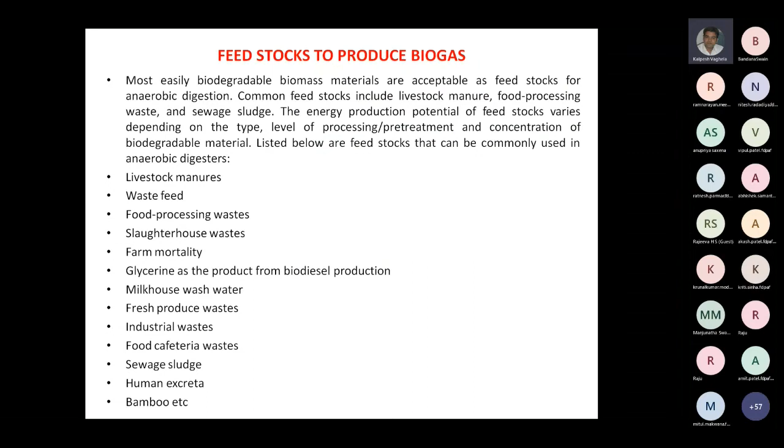The feedstocks which are commonly used for producing biogas are livestock manures, waste feed, food processing waste, slaughterhouse waste, farm mortality, glycerin which is available during biodiesel production, milkhouse water, wash water, fresh produce waste, industrial waste, food cafeteria waste, sewage sludge, human excreta, bamboo, etc.

Biogas production process can be divided into 3 stages. First stage is hydrolysis, second stage is acidification, and third stage is methane formation.

In hydrolysis, degradation of complex organic macromolecules into monomers during digestion is done. During acidogenesis, conversion of soluble monomers into volatile fatty acid is done. During acetogenesis, production of acetic acid is done. And during methanogenesis, conversion of acetic acid, hydrogen, and carbon dioxide into methane is carried out.

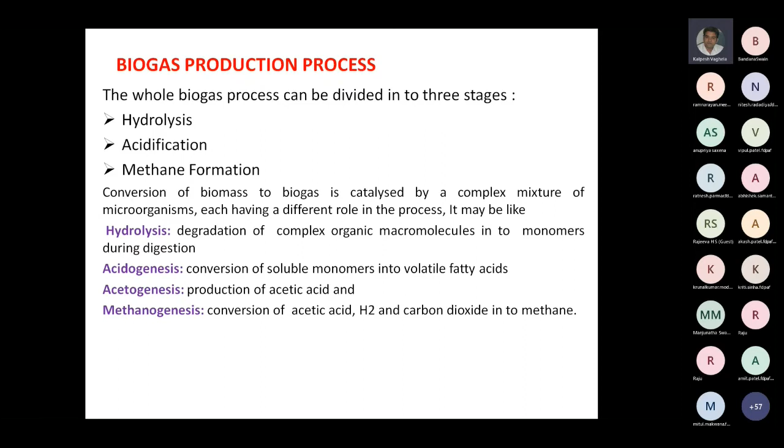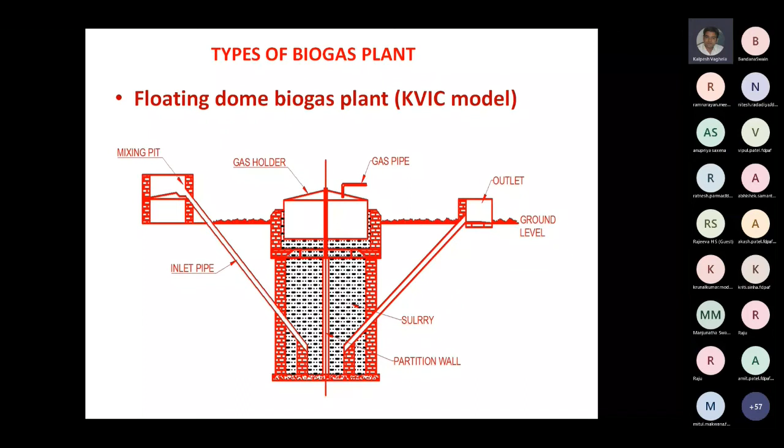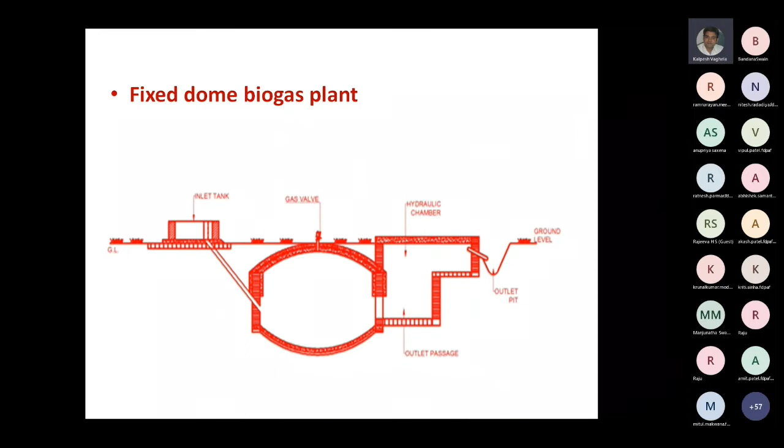Two types of biogas plants are mainly in use. For large capacity biogas plants, which we will be using for upgrading biogas, that will be a floating dome biogas plant that works on the KVIC model. Another model, known as fixed dome or Chinese model, we can consider only for lab use. For commercial production of biogas, the KVIC model is more in use.

The factors which affect production of biogas are temperature, solid concentration, loading rate, retention period inside digester, pH value of feedstock, toxic substances available in feedstocks, size and shape of digester, as well as stirring and agitation of content of digester.

Once you have obtained biogas, you can use it for different applications. Suppose you have to use it for a farm, then you can use it for producing electricity using gensets which will be using dual fuel mode engine. The same engine one can use to run an irrigation pump.

Also, food products, when you have to store for long duration, then you can use it in cold storage. In fact, the methane which is available is to be used as refrigerant, and that way you can use it.

For municipal use, as you know, municipality has to operate a sewage treatment plant, and during this sewage treatment process biogas is produced. So modern municipal corporations like Indore, Surat, Ahmedabad are getting biogas which is processed and then used to produce electricity. So they have installed biogas fuel plants.

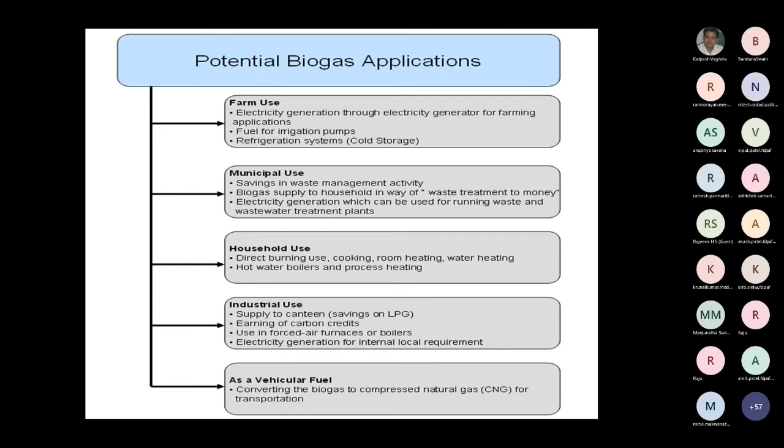Now, whatever biogas is produced, if we check its composition in percentage by volume, in biogas you may find methane, CH4, 50 to 70% by volume. If you check its carbon dioxide content, it may vary from 25 to 50% depending on feedstock.

Biogas may also have hydrogen in the range of 1 to 5% by volume, nitrogen in the range of 0.3 to 3%, and water vapor, almost 0.3% by volume. It may have hydrogen sulfide traces. Remember that cow dung is the feedstock which will give you the least amount of hydrogen sulfide, whereas all other organic matter may have hydrogen sulfide from 200 ppm to 1000 ppm. So cow dung is considered an ideal feedstock when biogas is to be processed to convert it into fuel for vehicles.

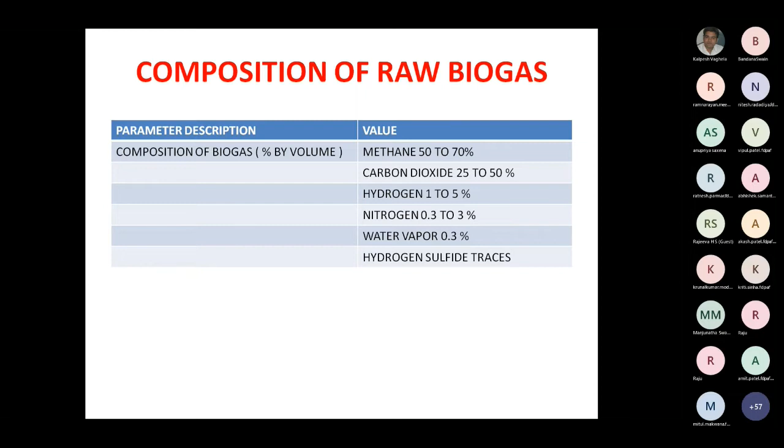Now this is the table which is showing you composition of raw biogas, upgraded biogas and compressed natural gas. If we compare methane content for all these three fuels, raw biogas has methane from 55 to 65%, whereas natural gas may have methane up to 89.14%, and upgraded biogas may have even up to 98%, but in general the value is about 90% methane, which is sufficient enough to be used as fuel for a vehicular engine.

Carbon dioxide, if we check, in raw biogas by percentage volume it will be 35 to 45%. When you upgrade that biogas, carbon dioxide will get reduced to almost up to 4%. In general, natural gas which is available naturally may have carbon dioxide around 4.38% by volume.

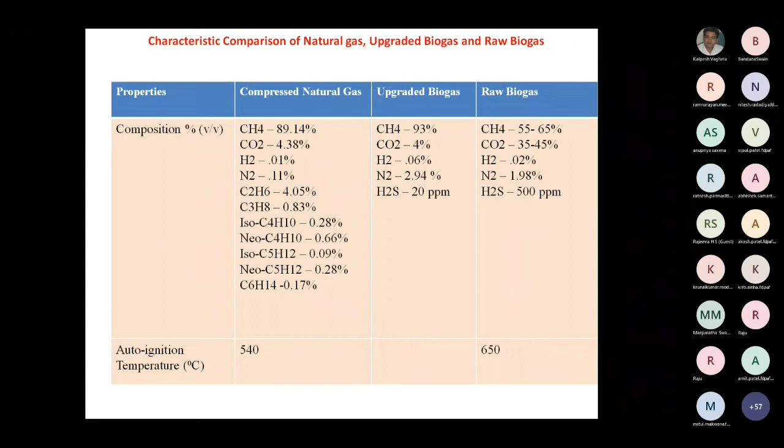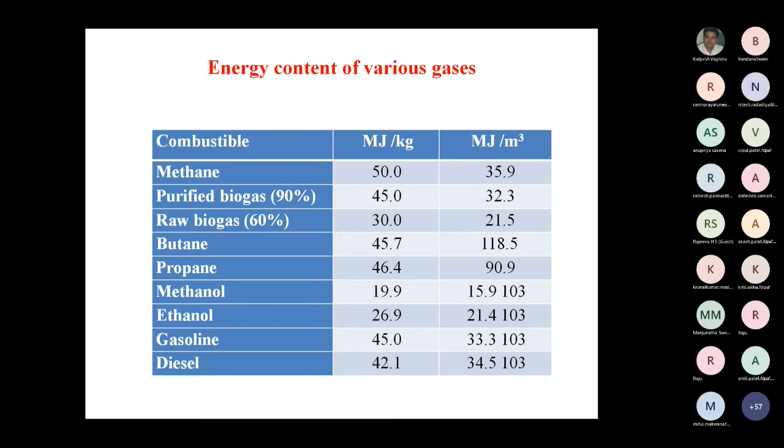If pure methane is there, its energy content is 50 megajoule per kg or 35.9 megajoule per meter cube. So higher the methane content, higher will be the energy content of your fuel. So purified biogas considered here is 90% methane. But if you are getting higher content of methane like 91 up to 98%, which is obtainable right now due to advances in processing biogas, then your energy content will be higher, and depending on that, more heat will be generated.

Now here different properties of biogases are discussed. Calorific value of raw biogas with methane content around 60% by volume is 21.5 megajoule per meter cube. Its auto ignition temperature, which is 650 degrees centigrade, is more as compared to petrol. Higher the auto ignition temperature, safer the fuel is considered. So as compared to petrol, raw biogas is considered a safe fuel. As this gas mixes readily with air even at low temperature, there is no need to provide a rich mixture during starting or idling.

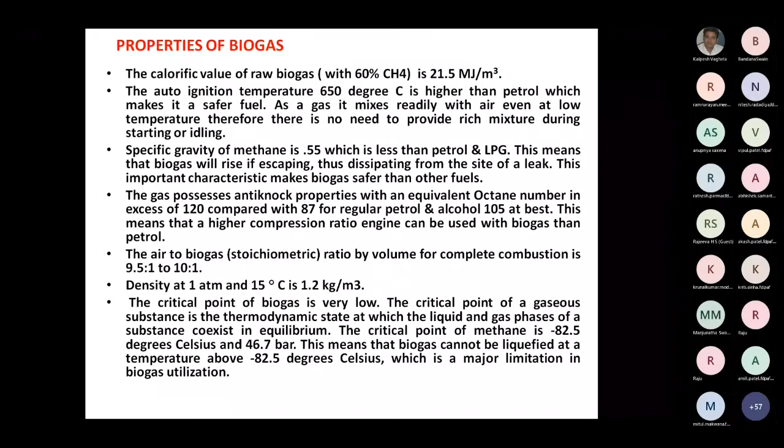Now, related to biogas and bio-CNG, certain initiatives are taken by the Government of India. In 1999, the NDA government focused mainly on biodiesel and bioethanol.

And after that, in 2010, the UPA government started promoting bio-CNG. Our Honorable Prime Minister has given 4 following principles of our vision of India's energy future: energy access, energy efficiency, energy sustainability, and energy security.

And for achieving this, different initiatives started by the Government of India are Gobardhan, NNBOMP, SATAT National Policy for Biofuels, BPGTP, and Waste to Energy Program.

Related to biogas, if we consider initiatives taken, Gobardhan stands for Galvanizing Organic Bio-Agro Resources. This project was launched in 2018 to convert cattle dung and solid waste in farms to compressed biogas and compost, which can be used as fertilizer.

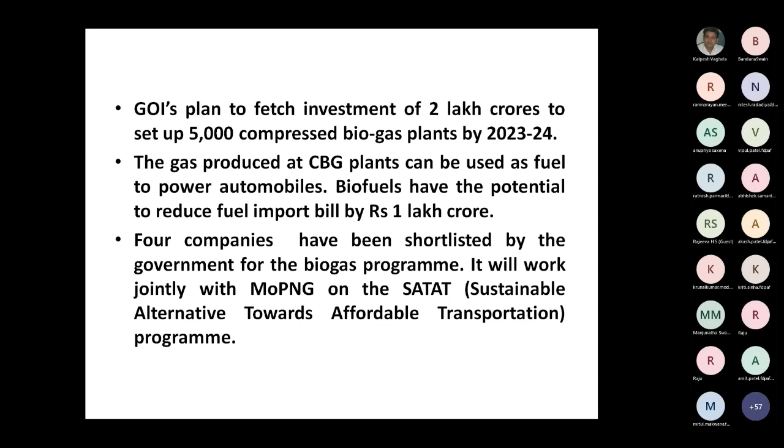Concentrating on composition of biogas, our main target is to increase methane content and reduce CO2, water, O2 and hydrogen traces. When you increase methane content of raw biogas, its composition becomes identical to natural gas. This gas is to be compressed like natural gas, then it will be known as compressed biogas.

When we have to use this biogas as fuel for engines, two different approaches are to be considered. Suppose you have to use it nearer to the plant at which biogas is generated, then we have to consider use of diesel engine, whereas when you have to consider its use as fuel for automotive applications, then it is to be considered as a replacement fuel for petrol.

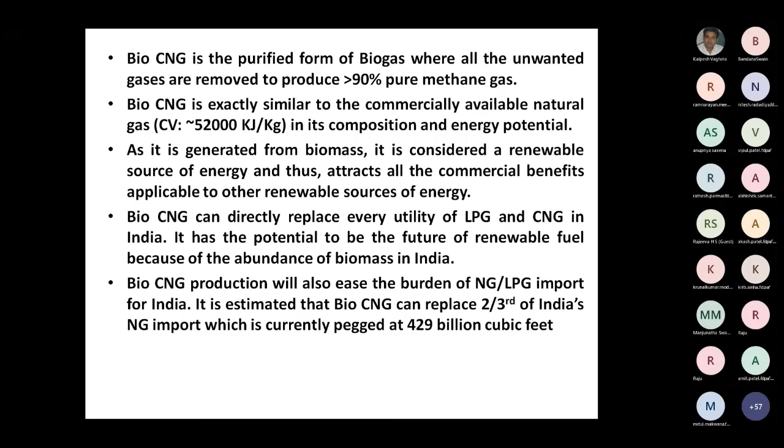So at different places, Government of India has started installing these biogas purification plants. It is targeted that if we use our resources available locally, then two-thirds of our natural gas import we can reduce, which is 429 billion cubic feet.

Now, where is the scope of biogas upgradation in India? You have seen in India there are so many common cattle sheds known as goshalas, as well as cattle ponds known as Panjrapols, where animals are given shelter. Such institutions are run on charity basis, and you may have seen these institutions are not that strong financially.

So if we install large capacity biogas plants at such locations, along with biogas upgradation and compression systems, this may enable these institutions to improve their financial capabilities utilizing their own resources. Considering this, government is promoting use of biogas and biogas operated engines, both stationary as well as automobile engines, which will emit zero or low pollution, thus may save environment.

Technological improvement in biogas for its use as vehicle fuel is a new and emerging field in India. This development of biogas production plant followed by enrichment and compression in a village or a cluster of villages can encourage rural entrepreneurship, which may help in sustainable rural development and can provide employment opportunity to so many people.

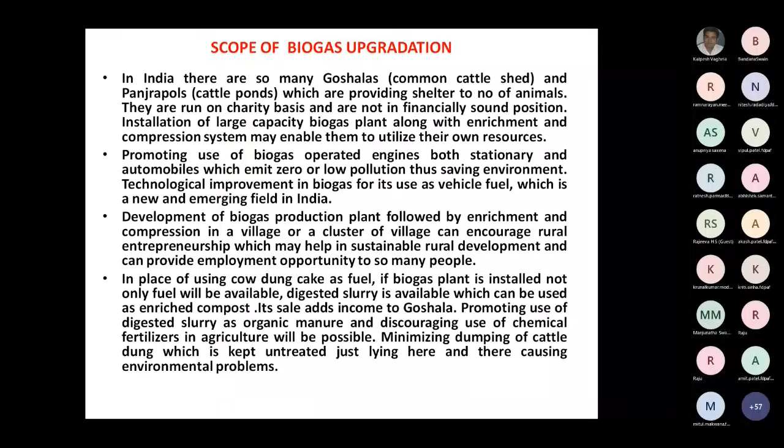Now we will consider biogas upgradation, starting with harmful effects of hydrogen sulfide, moisture and CO2. Hydrogen sulfide, which is present in biogas...

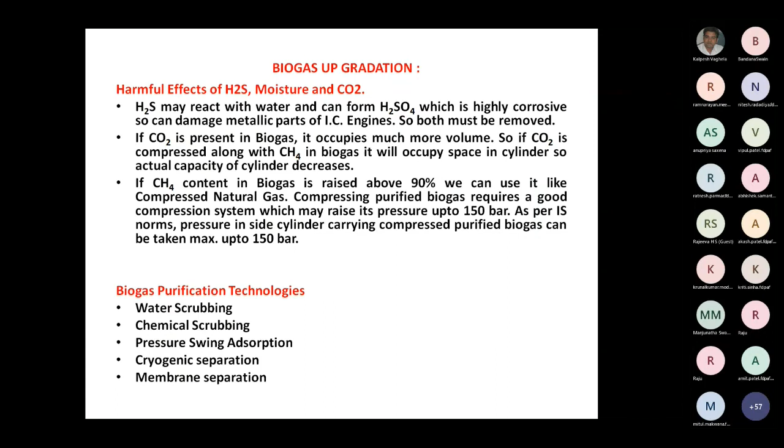That's why most people are installing water scrubbing units or pressure swing adsorption units. Chemical scrubbing is not much popular in India, but it is popular in European countries.

Now, when we have to increase the potential of biogas as a fuel for IC engines, how is that possible, what actions are required to achieve that, what are the targeted values, and which action will be useful for which application - that we should study.

First of all, we have to reduce its corrosive nature. To reduce its corrosive nature, we have to remove hydrogen sulfide and moisture from raw biogas. Once you have removed hydrogen sulfide and moisture from raw biogas, then you can use it as fuel.

for stationary IC engines. Right now, there are no standards suggested by BIS for this H2S content and moisture content when we have to use that biogas as fuel for stationary engines.

But to increase the life of our equipment, we have to reduce this hydrogen sulfide and moisture as much as possible.

So after removing hydrogen sulfide and moisture, your raw biogas will be a suitable fuel for stationary IC engines.

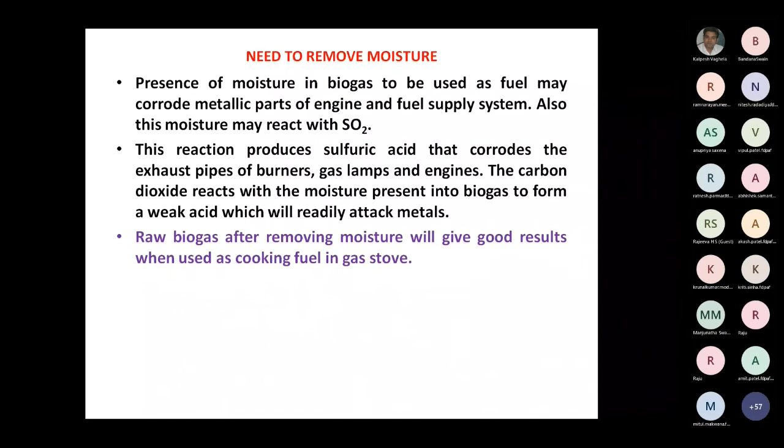One possible remedy is to add less sulfur-rich material in the plant, dilute with water and stir it vigorously.

So, whatever feedstock you are using for your biogas plant, you have to check its sulfur content, and accordingly you can control H2S.

Presence of H2S may cause corrosion to metal parts such as regulators, gas meters, valves and mountings. That is much more serious, as these will get corroded very quickly.

When you carry out combustion of biogas containing hydrogen sulfide, it will produce sulfur dioxide. And when the sulfur dioxide combines with water vapor, it will again produce sulfuric acid, which may corrode pipes of burners, gas lamps, engines, etc.

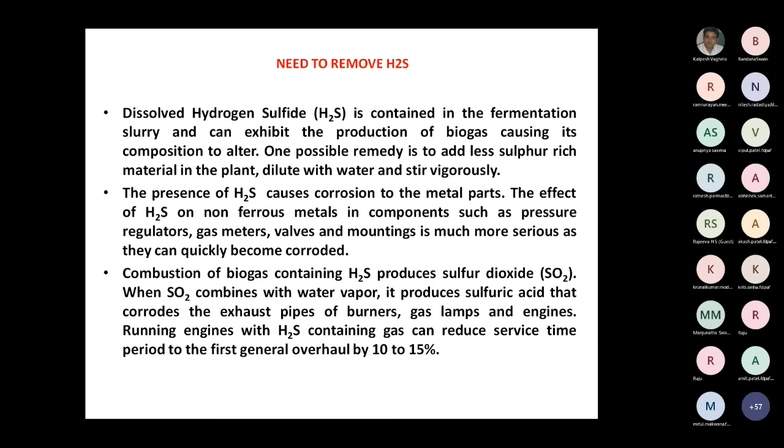So, running engines with hydrogen sulfide containing gas can reduce the service time period to the first general overhaul by 10 to 15%.

The gaseous SO2 also dissolves in engine oil, causing the oil to become acidic and lose its ability to lubricate, damaging the engine and shortening the life between oil changes.

The sulfur dioxide is considered more dangerous than H2S, as it is hazardous for health and environment. It will produce smog as well as acid rain.

Requirement for H2S removal from biogas varies depending on biogas utilization technology. In European countries, the H2S limit for electricity production by IC engines is kept limited to 100 ppm.

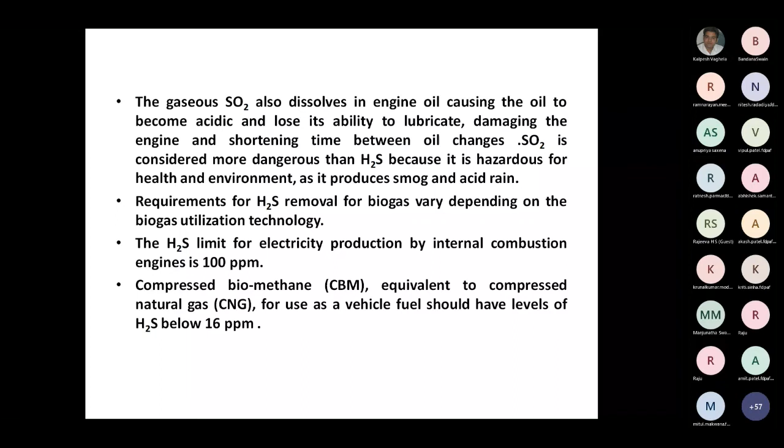Compressed biomethane equivalent to compressed natural gas, for use as a vehicle fuel, should have a level of H2S below 16 ppm as per our BIS.

Now we will see different techniques to remove hydrogen sulfide. The first technique is the oxidation process.

For this purpose, in the digester, a small amount of air - 3 to 6% of the volume of produced biogas - is introduced, for which small capacity compressors or blowers are used. This results in the chemical reaction: 2H2S plus O2 gives 2S plus 2H2O.

By adding ferrous materials also we can remove sulfur. For this, we can use oxidized steel wool or chips of iron cut, which is easily available from lathe operations. When raw biogas comes into contact with steel wool or chips, this iron oxide gets converted to elemental sulfur.

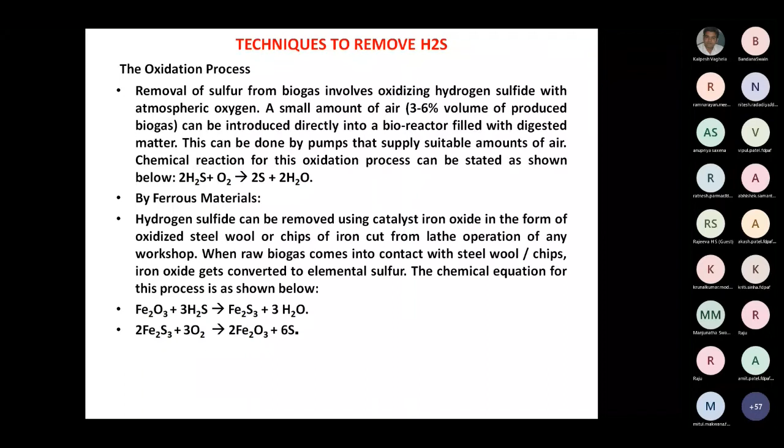The chemical equation for this process is: Fe2O3 plus 3H2S gives Fe2S3 plus 3H2O. Then after this, 2Fe2S3 plus 3O2 gives 2Fe2O3 plus 6S. This way sulfur is removed.

Wet technique to remove H2S: for this, caustic is used. NaOH plus H2S gives NaHS plus H2O. This hydrogen sulfide reacts with sodium carbonate present in solution, forming sodium hydrosulfide: H2S plus Na2CO3 gives NaHS plus NaHCO3.

This hydrated iron oxide introduced in solution will react as: Fe2O3 plus 3NaHS plus 3NaHCO3 gives Fe2S3 plus 3H2O plus 3Na2CO3 plus 3H2O.

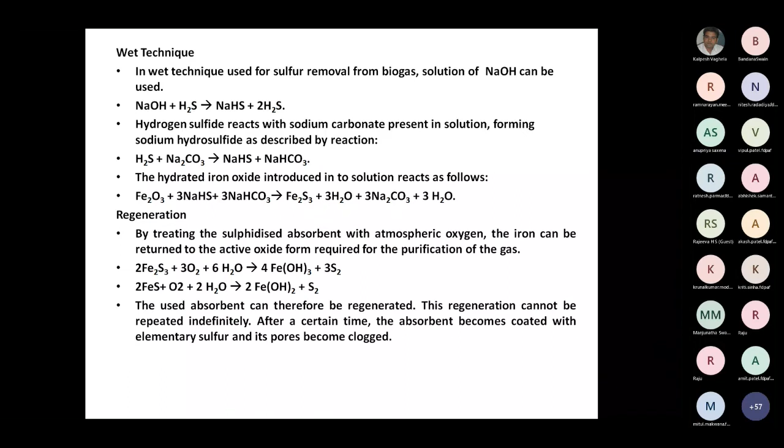Now, regeneration is also possible by treating the sulfide absorbent with atmospheric oxygen. The iron can be returned to the active oxide form required for purification of biogas. This regeneration cannot be repeated indefinitely. After a certain time duration, these absorbents become coated with elemental sulfur and their pores become clogged.

Now, the potential of biogas and bio-CNG. Natural gas contains 75 to 98% methane along with a small percentage of propane, butane, ethane, etc. Whereas raw biogas may have 60% methane and 40% carbon dioxide.

So the techniques already in use to process natural gas can be used for upgrading the quality of biogas also, by enriching its methane content up to the level of natural gas. Now, to utilize biogas as fuel for IC engines, two different approaches are considered: biogas to produce electric power, and biogas to bio-CNG.

In the power project, biogas is first cleaned and H2S and moisture are removed. Then biogas is fed to the power generating unit to convert it into electricity. Here there is no need to remove CO2, but removal of hydrogen sulfide is important as it is highly corrosive.

In case of bio-CNG production, biogas is cleaned of H2S and CO2 to produce 95% methane. The bio-CNG produced is then compressed and bottled for transportation to the utility site.

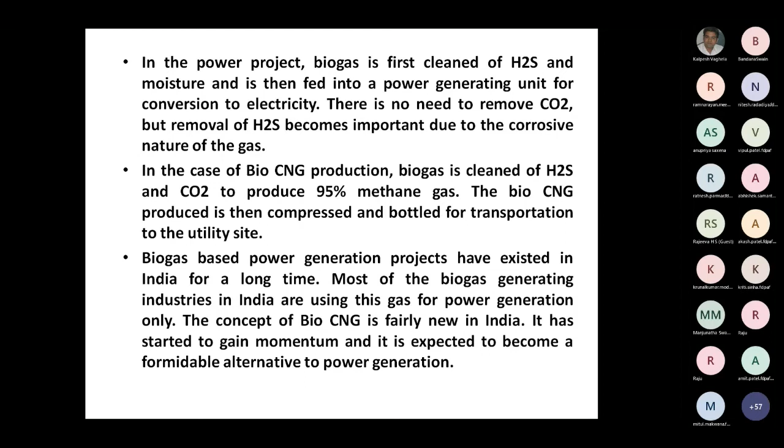Now, related to the use of biogas as fuel for stationary engines, we will study that first, and then how it can be used as fuel for vehicular engines, we will see afterwards.

So first case study: the animal hostel project started by the Government of Gujarat at Akodara village near Himmatnagar. Here villagers do not keep their cattle at home; all cattle are managed under a cooperative approach, with a common cattle shed constructed where cattle are kept.

At that place, a Gobar bank has also been set up to generate electricity. The power produced by the Gobar bank satisfies the internal needs of the animal hostel.

At this Akodara site near Himmatnagar, you will find 36 sheds. Water availability is through a 1 lakh liter water tank and a sump of 80,000 liters. Here you will find 3 units of 85 cubic meter plants, totaling 255 cubic meters of biogas plants.

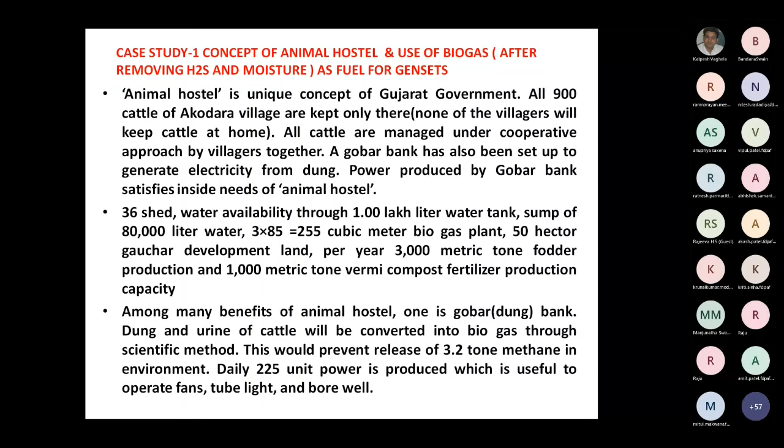This prevents the release of 3.2 tons of methane into the environment. Methane is highly dangerous when released to the atmosphere. Daily, 225 units of power are produced, which are used to operate fans, tube lights, and bore wells.

This is a photograph showing this animal hostel at Akodara near Himmatnagar. Here, the caretaker of the animal hostel collects cow dung and brings it every day to the biogas plant, where it is weighed.

This cow dung is stored in a storage tank, where there is a crusher to crush it. Cattle dung taken from the dung loading platform area is delivered to the feed preparation tank section, where it is mixed with water, maintaining a ratio of 1:1 for fresh cattle dung and 1:1.25 for stale or hard cattle dung.

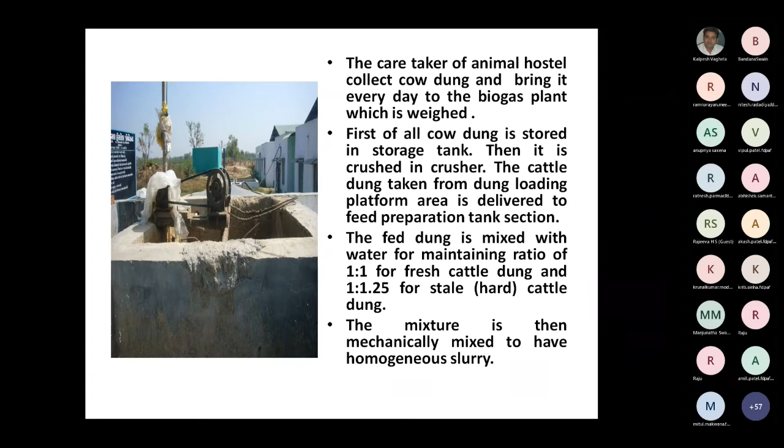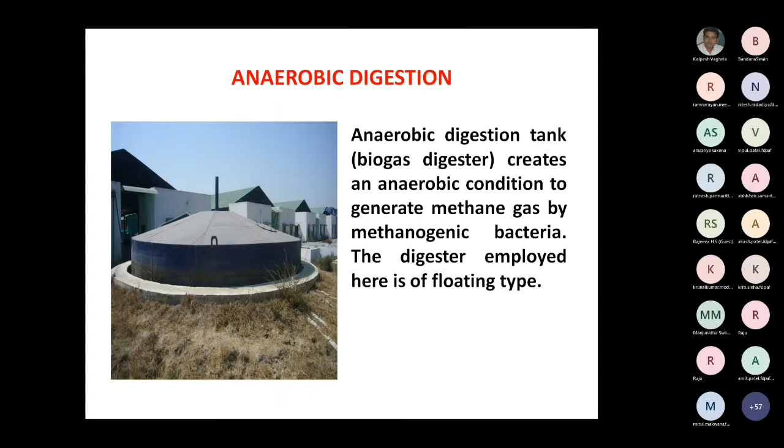The mixture is mechanically mixed to form a homogeneous slurry, then passed to the anaerobic digestion tank or biogas digester, creating anaerobic conditions to generate methane gas by methanogenic bacteria. Here a KVIC type biogas plant is used, employing a floating type biogas plant. There is a common collecting tank, which is an intermediate gas storage before the pressure regulating tank, provided for distribution to concerned beneficiaries.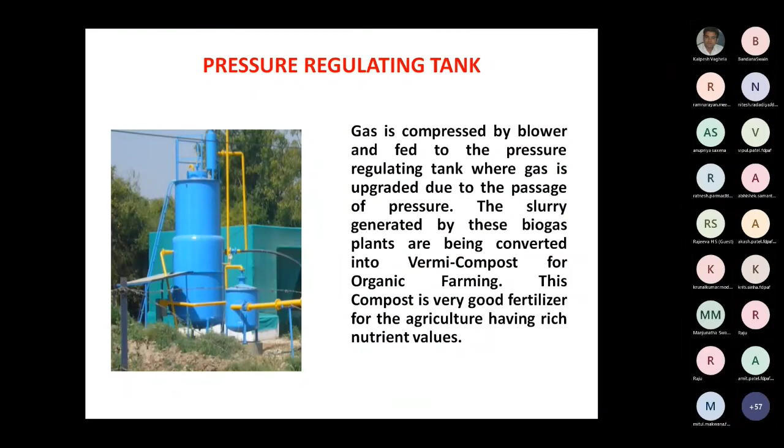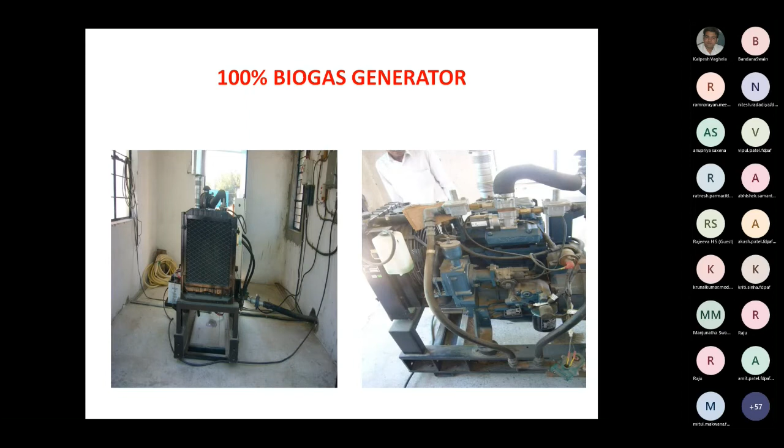Here at the site you will find a Kirloskar made biogas genset that runs fully on biogas. This is not a dual fuel engine; it uses only biogas after removing moisture and H2S. This shows the specification of that biogas generator, which runs fully on biogas.

This generator produces electricity used to run a 10 HP electric motor for pumping water, 275 light bulbs of 40 watts for lighting, and 120 fans of 100 watts, which are also used at this animal hostel.

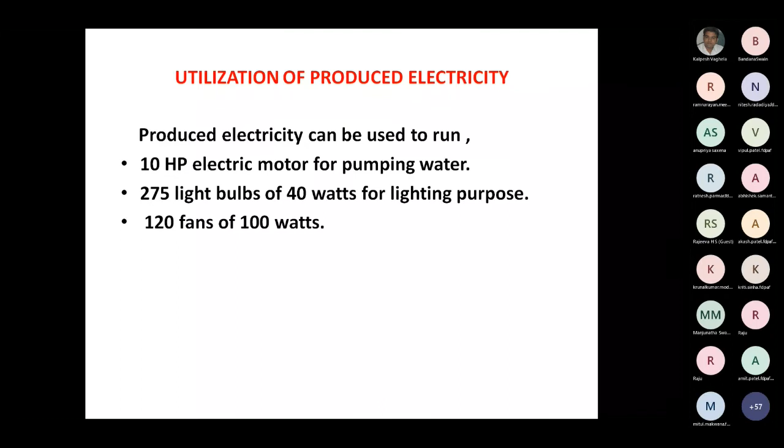The second case we will consider is the Laxmanpura site, a community biogas plant situated near Palanpur. Here a different reactor is used, called a moving bed high rate anaerobic reactor, used to generate biogas using multi-feed technology.

Here not only cow dung is used, but also vegetable waste. Near Palanpur from Disa, potato waste is available and mainly used at this site, but over and above that, agriculture waste, sugar mill waste, food waste, and poultry waste can all be used for this reactor.

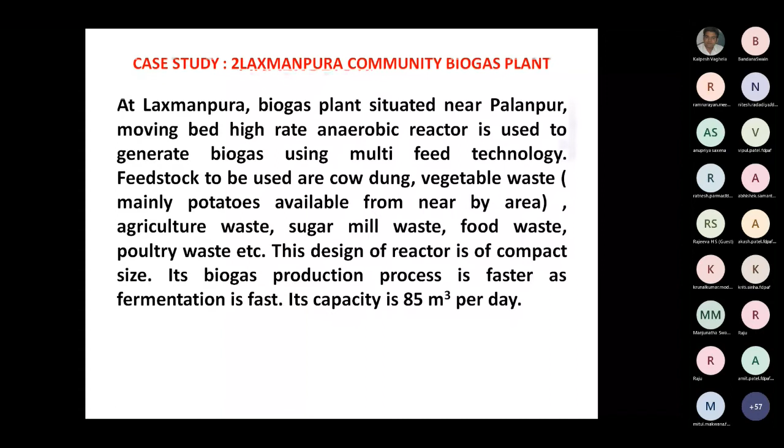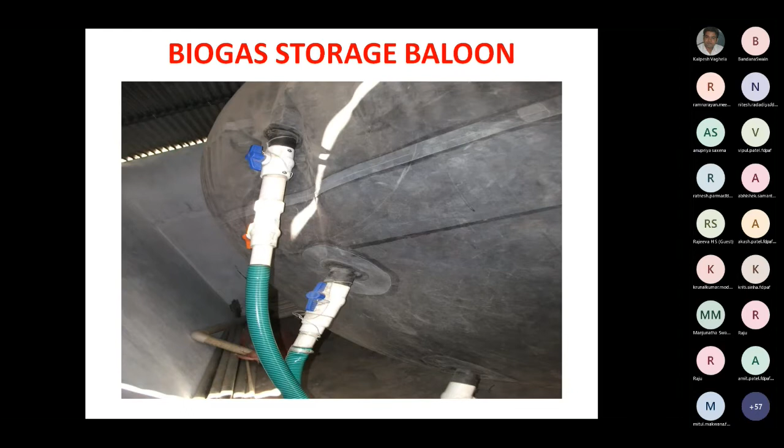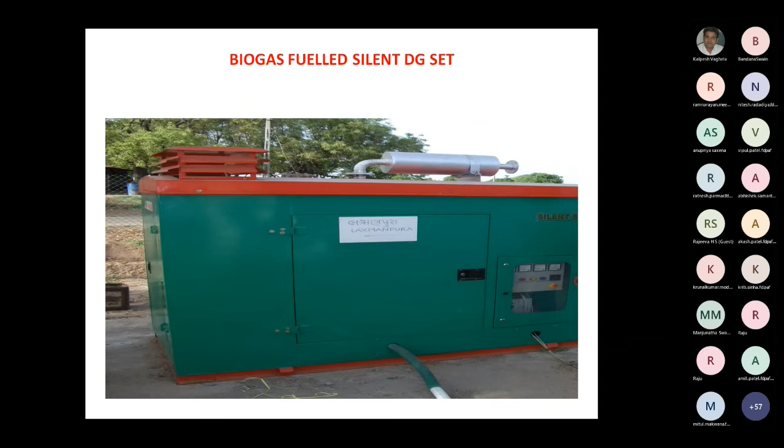This shows the biogas storage balloon. The gas produced is stored in large sized balloons, and before supplying it to the genset, it must pass through the H2S scrubber where H2S and moisture are removed. Here a silent DG set is used, also running fully on biogas. This is a single fuel engine, not a dual fuel engine.

For biogas generation and utilization at this community biogas plant, all villagers bring cow dung regularly, which is stored, crushed, and then supplied to the digester for the acidic process. Then it is supplied to the second digester for bacteria generation. After that, the produced biogas is stored in a balloon made from flexible synthetic material.

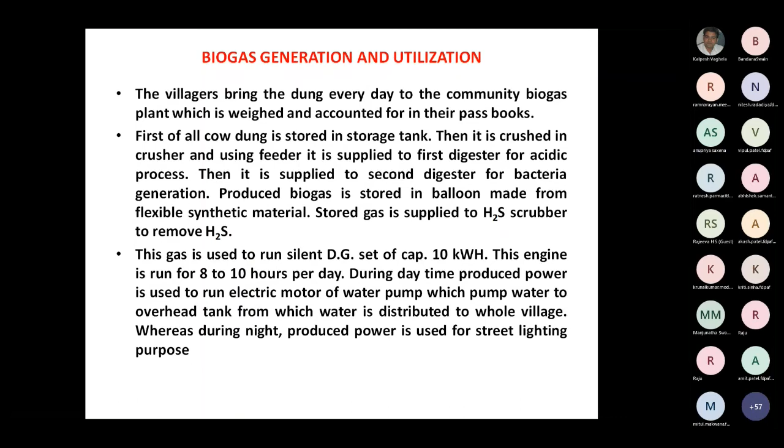The stored gas is then supplied to the H2S scrubber to remove H2S, and after that this gas is supplied to run a silent DG set of 10 kilowatt hour capacity. This engine runs for 8 to 10 hours daily, for the same purpose as considered for the Akodra site.

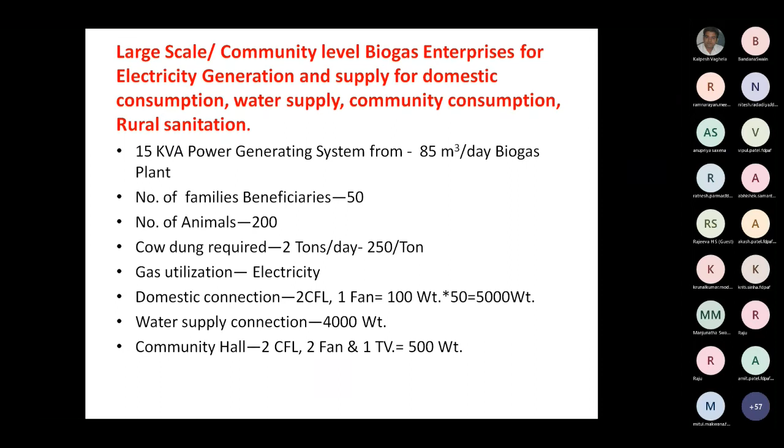Now, when we have to use this purified biogas as fuel for vehicular engines, we have to consider this treatment. After removal of H2S and moisture, you can use that biogas for stationary engines, but when you have to use it as fuel for vehicular engines, you also have to remove CO2.

CO2 is present in raw biogas at a very high concentration. This decreases its energy content per unit mass or volume and limits its use for low quality energy applications.

The presence of CO2 is highly undesirable because it lowers power output from the engine, occupies additional space in gas storage cylinders, requires more frequent refilling of the vehicle's fuel tank, and results in more energy consumption in compression of biogas. So if CO2 along with methane is compressed and supplied to the storage tank, the more CO2 there is, the more energy is wasted, as CO2 is in no way useful for increasing the energy content of our fuel.

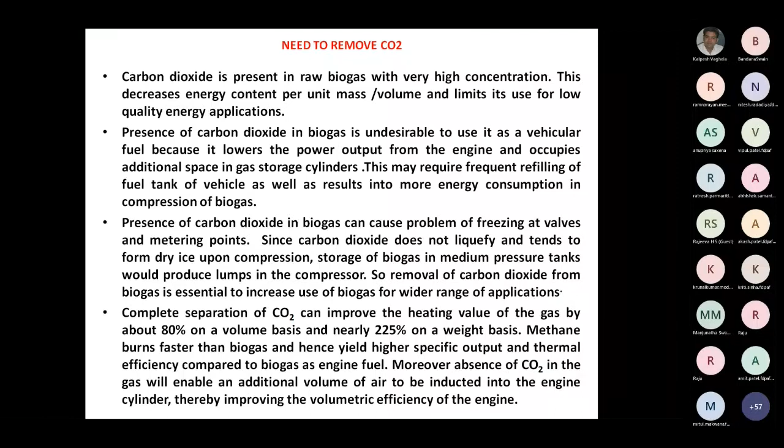Also, if CO2 is absent in your biogas which is to be used as fuel, this will enable an additional volume of air to be inducted into the engine cylinder, which will improve volumetric efficiency of the engine. This way, CO2 should be as minimum as possible.

Carbon dioxide from biogas can be removed by different techniques, such as water scrubbing, caustic scrubbing, solid absorption, liquid absorption, and pressure separation. If we consider all these techniques, the simplest and cheapest method of removing carbon dioxide is by washing the gas with water under pressure.

A large quantity of water is required to absorb CO2, and the corrosive acidic spent water needs special attention. So you have to consider installation of such a unit only where an abundant quantity of water is available. For places where there is scarcity of water, you cannot use water scrubbing; you have to go for chemical scrubbing or any other such process.

Caustic scrubbing is carried out by allowing CO2 in biogas to react with caustic solution, forming an irreversible carbonate and subsequently reversible bicarbonate. For this, a solution of NaOH and water in 40:60 ratio by weight can be prepared in a container. Then raw biogas is allowed to pass through the solution, giving the reaction: 2NaOH + CO2 gives Na2CO3 + H2O.

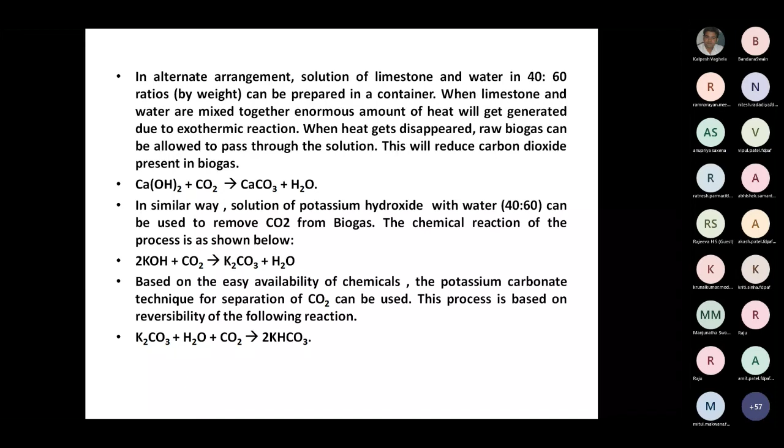Now this is showing you BIS 16087, which was available in year 2016. When you have to use biogas as fuel for automotive application and inject it into a piped network, you know natural gas pipeline is laid by Gas Authority of India Limited as well as Gujarat State Petroleum Corporation, GSPC. So when purified biogas has to be injected into such a pipe network, you have to change its composition, and for that BIS 16087 was made.

Here methane should be minimum 90%. CO2 should be maximum 4% volume by volume. Carbon dioxide plus N2 plus O2 combined together should not exceed 10%. Oxygen content separately should not exceed 0.5% volume by volume.

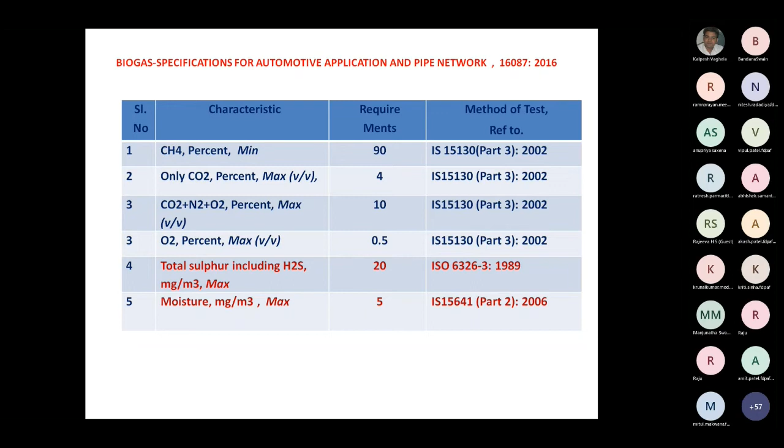Sulfur, including hydrogen sulfide in your biogas, should not increase beyond 20 milligram per meter cube. Likewise, moisture should be limited to 5 milligram per meter cube. This is a very important standard available since year 2016. So if you have to install a biogas upgradation plant, you have to produce purified biogas satisfying these specifications suggested.

Now we will see different biogas purification techniques. More importance is to be given to physical absorption, chemical absorption, and pressure swing adsorption, which are the techniques in use for commercial purposes, whereas two techniques, cryogenic technique and membrane technique, we will consider only to understand that these are processes one can also use for purifying biogas.

Now this schematic arrangement is showing you physical scrubbing. As per Henry's law, CO2 is more soluble than methane. That is the working principle on which this system is designed to work.

Here you can see raw biogas is coming from the plant. There is a compressor which will compress this biogas. The value considered is 0.4 to 1 megapascal and temperature considered is 40 degrees centigrade. This way raw biogas is compressed, and we have to supply it for processing purpose.

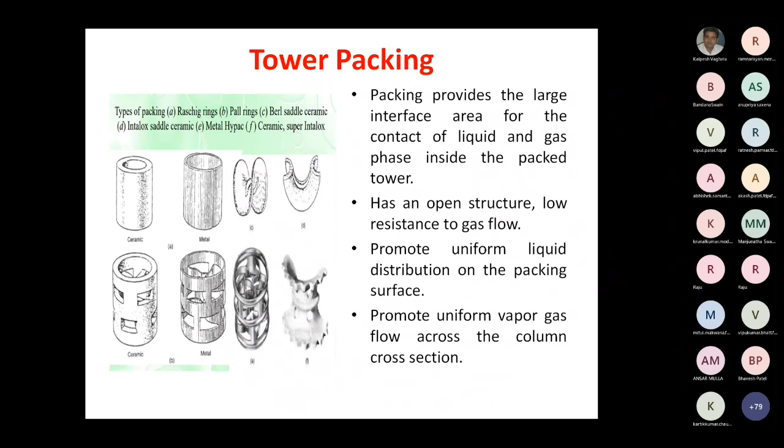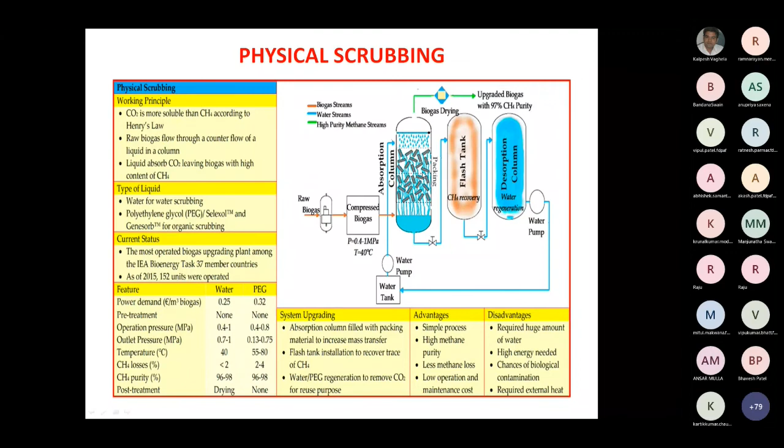When a packed column is used, you have to make use of these tower packings. These packings provide a large interface area for the contact of liquid and gas phase inside the packed tower. This has an open structure, low resistance to gas flow, and promotes uniform liquid distribution on the packing surface as well as uniform vapor gas flow across the cross section. So these tower packings you have to use at this section, in the column, at this place you have to provide such tower packings.

Now one low cost biogas purification unit which was developed is shown here. Here you can see the arrangement. From top of this column, this green pipeline shows supply of water. Water is pumped, and with increased pressure, water will be supplied from this point. Raw biogas will be entering from the bottom.

Here you have to provide such a seal to escape backflow of gas. If you provide such a loop seal, water will get retained here, so it will provide a seal against the gas. So it is a must to provide such a water seal.

Water will be sprayed through a nozzle from the top, and raw biogas will be entered, supplied from the bottom. There will be physical scrubbing, and then biogas will come out from the top, so the outlet of purified biogas is taken from the top.

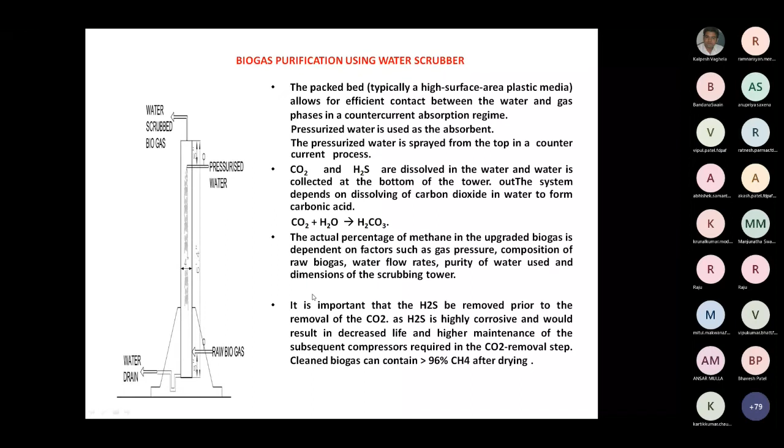This way, using water scrubbing, we can remove hydrogen sulfide and CO2. Once hydrogen sulfide and CO2 are removed, you can use it as fuel for vehicular purposes, and for that purpose you have to compress it. This is showing CO2 plus H2O, that gives you H2CO3, so the water which will be drained will be having carbonic acid.

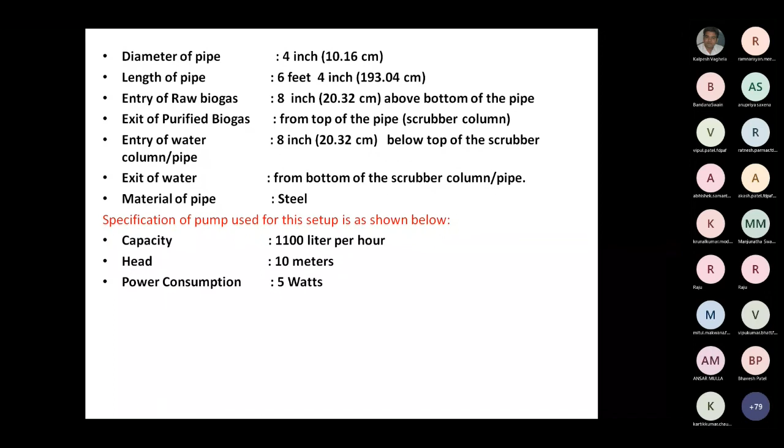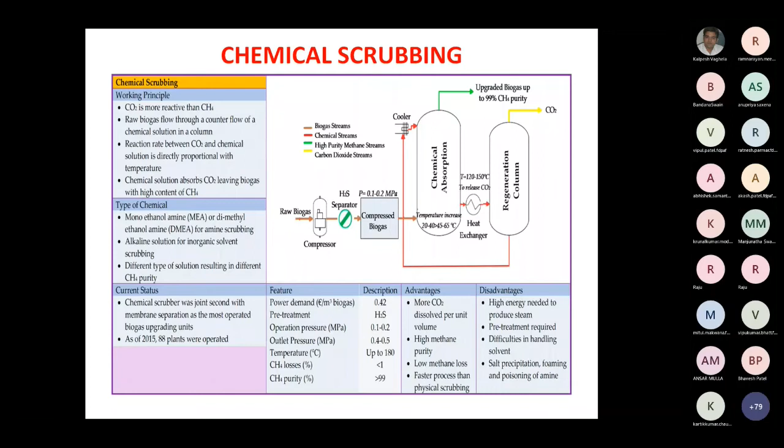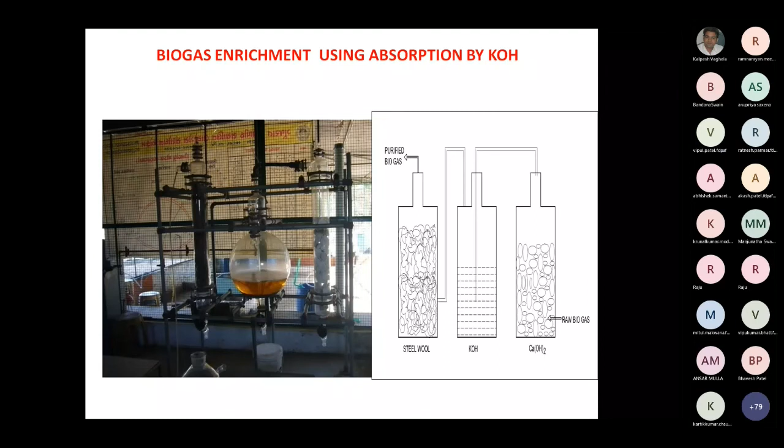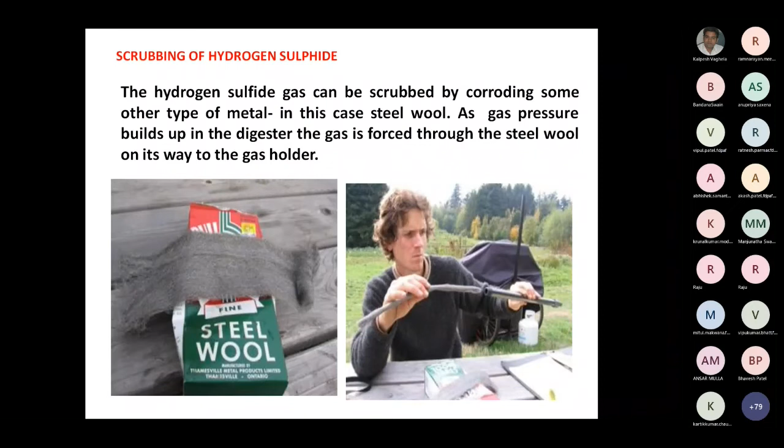So this is showing how steel wool can be used for removal of H2S. For any stationary engine, you can make such a unit - this H2S scrubber - yourself. Just take any PVC pipe and insert steel wool inside. Biogas will have to pass through the steel wool, and when it does, it will corrode the steel wool, resulting in elimination of sulfur and H2S.

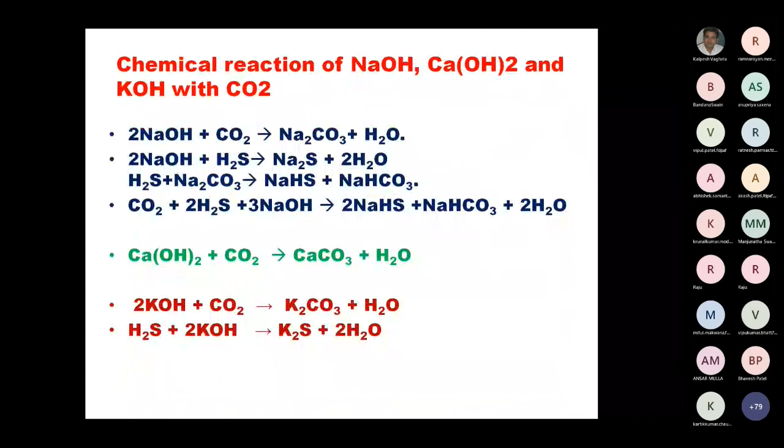This is showing use of NaOH for removal of H2S and CO2. Now when you are using all these three different chemicals, NaOH, Ca(OH)2 or KOH, and if you are using two different pressures - the pressure at which biogas is generated, same pressure you are supplying, and in the second case you are supplying biogas after compressing it to 10 bar - you will get different results.

Caustic as well as lime both are available in large quantity in our Saurashtra region as well as in our South Gujarat region. In South Gujarat region, we don't have scarcity of water, whereas in Saurashtra region there is scarcity of water. So preference is given to such chemical scrubbing. With use of potassium hydroxide, we can get the best result.

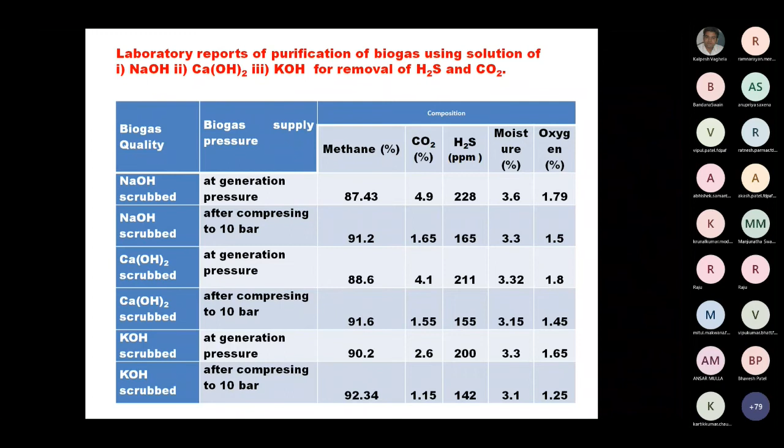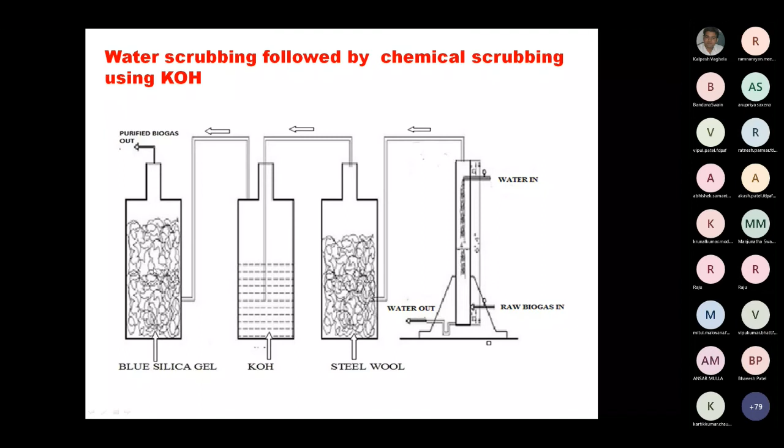This is showing that setup. Steel wool - first of all, raw biogas that will be supplied to water scrubber, then after steel wool, then after KOH, and for removal of moisture, blue silica gel is used.

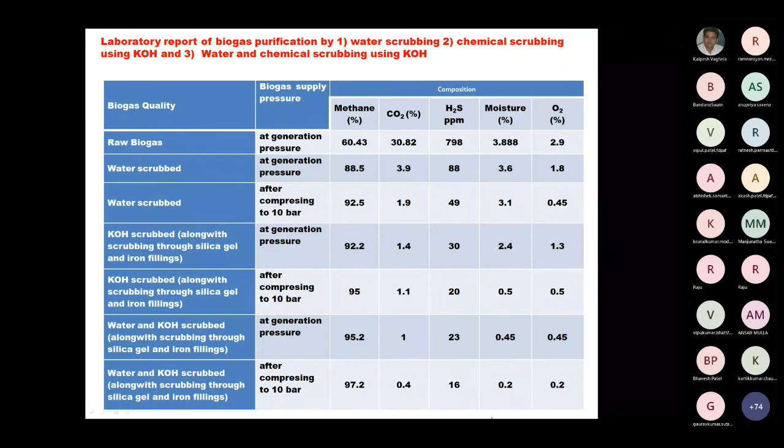Now another technique which is becoming more and more popular where scarcity of water is there. Also when you have to consider use of chemical scrubbing, depending on which chemical you are using, cost is associated. So considering scarcity of water and considering cost of chemical, another technique which is being used and which is becoming more and more popular is the pressure swing adsorption technique.

This technique was originally developed by Linde, and then after that the technology was transferred to many other organizations. In India, the technology is given to BHEL. Previously it was BHPV, Bharat Heavy Plates and Vessels. That unit is taken over by Bharat Heavy Electricals Limited. So they are providing such pressure swing adsorption units for purifying biogas.

And if we consider locally, in Ahmedabad only there are 4 different private players which are highly popular all over India. One of that organization is Atmos Power. Whether you visit Rajasthan, Madhya Pradesh, or Haryana, at all different places you will find pressure swing adsorption process to purify biogas that is supplied by Atmos Power, the company situated at Naroda, Ahmedabad. So what is the working principle of this technique?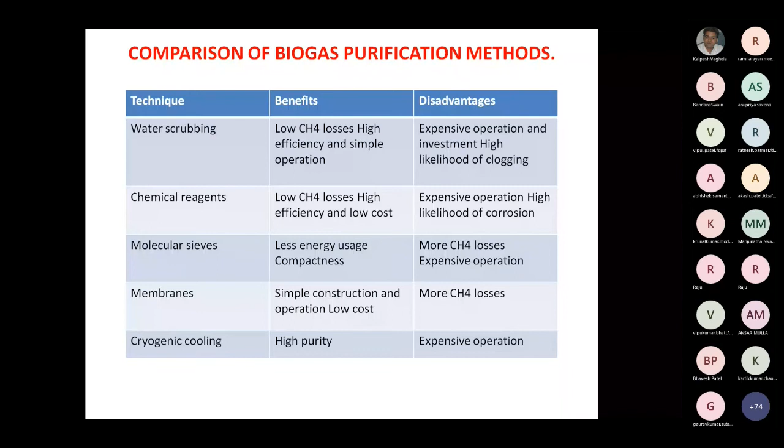Now once biogas is upgraded, then it is to be compressed so that you can transport it from one place to another place. So the energy density of upgraded biogas is comparatively low at ambient pressure, and as a result, it must be compressed at high pressure, 200 to 250 bar, to allow sufficient storage in bottles or cylinders.

You have seen in case of CNG, almost 200 bar pressure is taken. Previously, Government of India organization, the regulatory body PESO, had given 150 bar as the maximum pressure allowed. Now it is allowed up to 200 bar, but in the field I have seen people taking pressure up to even 250 bar for their cascades when it is to be transported from one place to another.

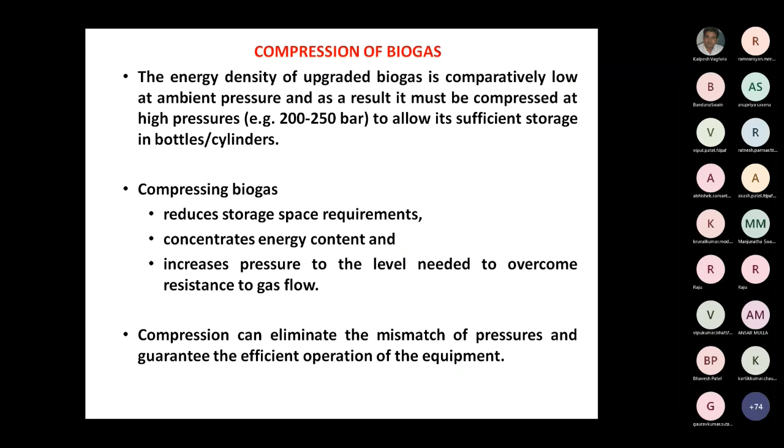Compressing biogas will reduce storage space requirement, will concentrate energy content, and increases pressure to the level needed to overcome resistance to gas flow. Compression can eliminate the mismatch of pressure and guarantee the efficient operation of the equipment.

Here you can see the schematic arrangement of one biogas bottling plant. Here a high pressure compressor is required, a cascade of storage cylinders is required, and then a dispensing nozzle for filling the compressed purified gas in the vehicle is required.

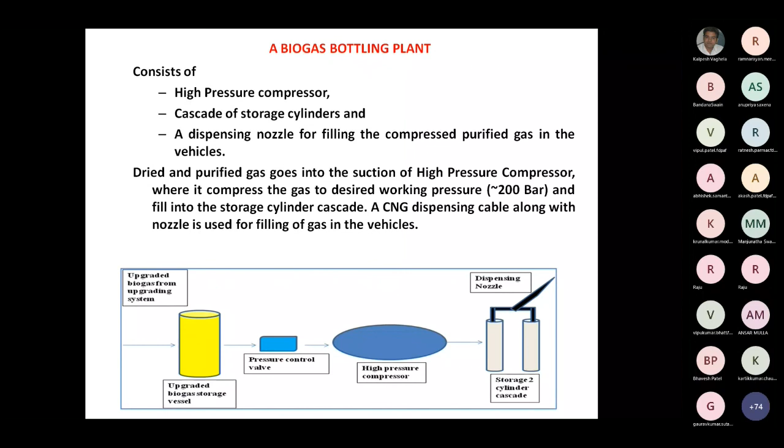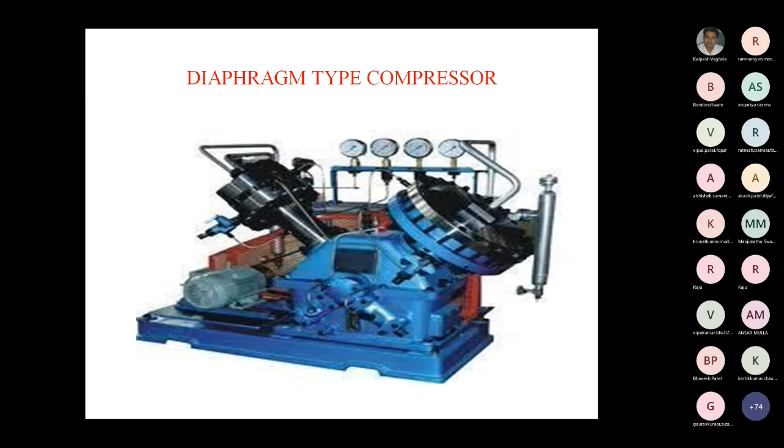Such high capacity diaphragm type compressors are required. The main problem found with use of purified biogas is the cost of this compressor for the bottling plant. In fact, natural gas is also to be compressed, so that way we can consider that the same compressor also is to be used for compressing biogas.

Now when we consider storage cylinders where biogas is to be stored, LPG cylinders can store only less quantity because the pressure allowed is 14.2 bar only. If you are using CNG cylinders to store purified biogas, then 200 to 250 bar pressure is possible, whereas with composite cylinders, here again you can raise pressure up to 200 to 250 bar.

Now if we consider storage capacity, for regular CNG cylinders, 8 to 10 kg of purified biogas with 90% purity can be stored. Also 8 to 10 kg of purified biogas at 200 bar pressure can be stored in composite cylinders. But the cost of CNG cylinders is less, around 10,000 to 20,000 depending on capacity, whereas composite cylinders are still costlier in India, but as their weight will be less, for certain vehicular applications we can consider use of composite cylinders to store biogas.

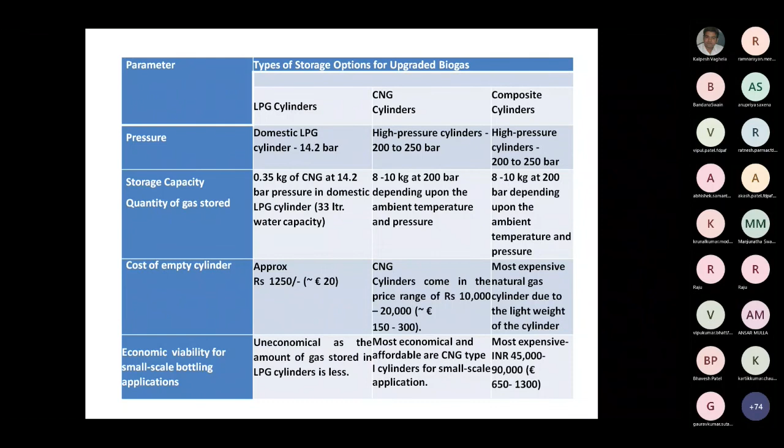Different biogas plants which I have already visited where water scrubbing technique was used to remove H2S, CO2 and moisture. That is Madhav Gaushala near Bhilwara. Here biogas is processed by water scrubbing technique. They are using DG sets with two cascades of 2 cylinders. Here purified biogas is used to run vehicles for that ashram and that Gosala.

Then after Muni Ashram near Vadodara, here also you will find a water scrubber. Here also they are using purified biogas, but only as cooking fuel for their canteen at Cancer Hospital at Goraj. Then after, Shashi Energy Tohana in Haryana, they are also having this water scrubber unit. Here also purified biogas is supplied as cooking fuel to local halwais.

Local manufacturers of plastic tanks, Enhanced Energy Incorporate, Savali near Baroda, they are processing biogas. Here also they are supplying purified biogas only to be used as cooking fuel. IIT Delhi has a demonstration unit where water scrubber is there. They are bottling that purified biogas and they also run one wagon using that biogas.

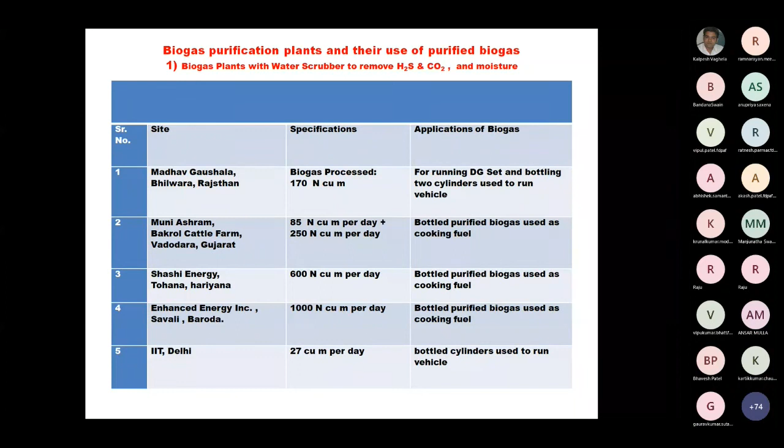Whereas for pressure swing adsorption technique, the first biogas purification plant which was commercially successful was Ashoka Biogreen plant at Talwadae near Trambakeshwar near Nasik. This is the plant at which maximum experiments are done by MNRE, our Ministry of New and Renewable Energy. They generate 160 units. The Ashoka group operates certain educational institutes having hostels also, so purified biogas is supplied as cooking fuel as well as for the vehicles transporting those bio CNG cylinders, which also use that purified biogas.

Muni Ashram Bakrol near Vadodara, they are purifying using water scrubber as well as PSA system also since 2017. Here they are using that purified biogas as cooking fuel for their cancer hospital at Goraj.

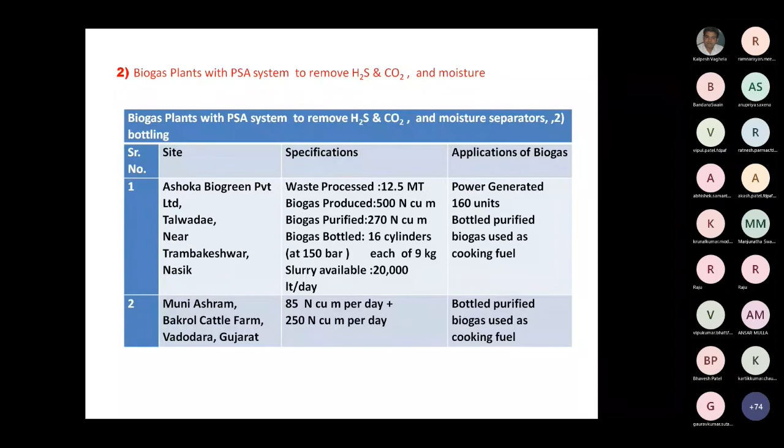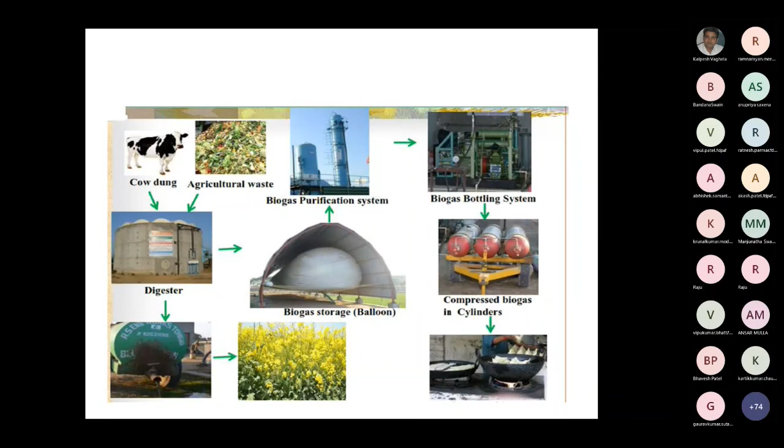So this is showing schematic arrangement starting from cow dung, how biogas can be purified, bottled, and used as fuel for different applications. For cooking application here it is shown. So this way we can see to use biogas as fuel for stationary engine we have to remove moisture and hydrogen sulfide only.

Maximum work is done on water scrubbing and now people have started working on chemical scrubbing also. So chemical which gets consumed needs regeneration, and people are working on minimizing consumption of such chemicals. So these days more and more people are giving preference to PSA based technique, and using PSA technique it is very easy to remove CO2, moisture and hydrogen sulfide so that the fuel available after purification can be used easily as fuel for vehicular engines.

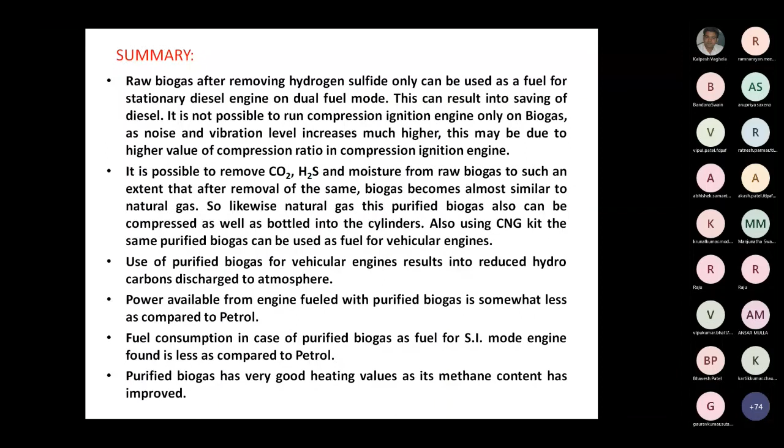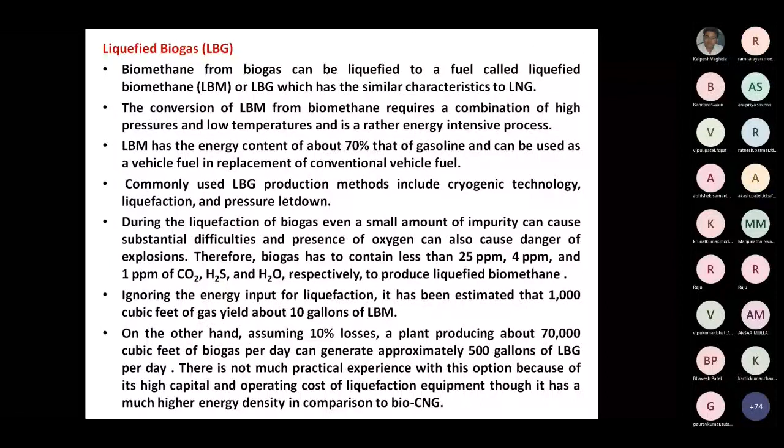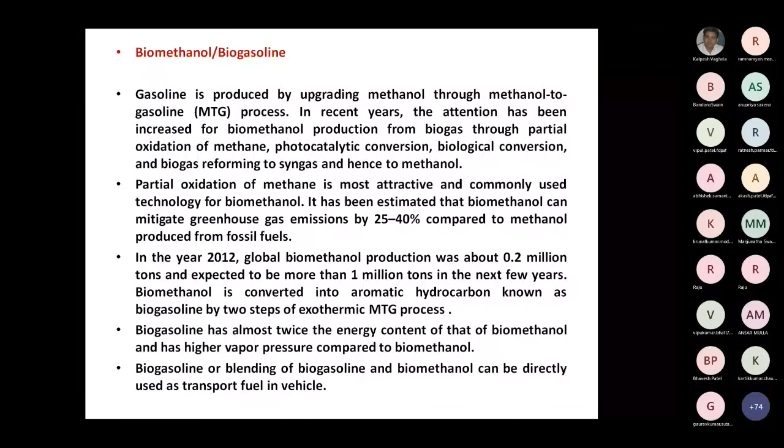These are different techniques which one has to use: Bio CNG, then if you are having a cryogenic plant, then liquefied biogas, then biomethanol or biogasoline, which is one new technique being developed. Here gasoline is produced by upgrading methanol through the methanol to gasoline process. This technique is still in development stage, but it is possible to get methanol from methane which is available with your biogas.

So this way one can use biogas as fuel for petrol engine as well as diesel engine. Then what is the optimum compression ratio that needs to be checked. Also tribological studies one can carry out. Also commercial viability of biogas purification and bottling plant, that also one can find. So comparative study between CNG and purified compressed biogas on engine performance, that also one can carry out.

Application of purified biogas is not only limited to cooking purpose or fuel for your vehicular engine. Also you can use it for gas cutting purpose, gas welding purpose. Remember, you are using acetylene for gas cutting or gas welding; in place of that, you can use this purified biogas also. Also biogas we can convert into formaldehyde as well as methanol.

So these all are new research areas in which you have to start with use of biogas. So this way biogas, and after its purification, is found very useful when you have to use it as fuel for different applications.